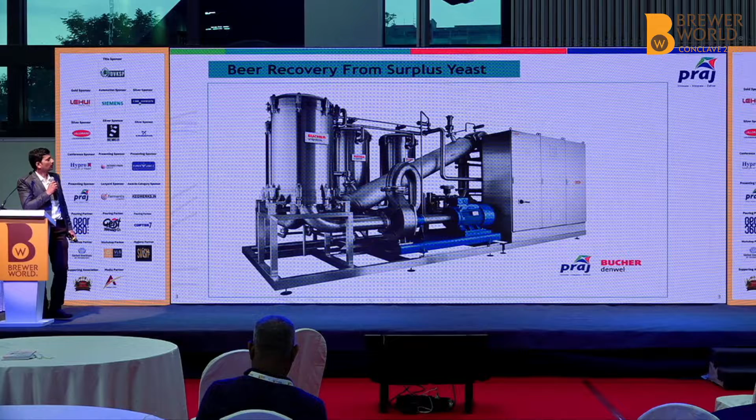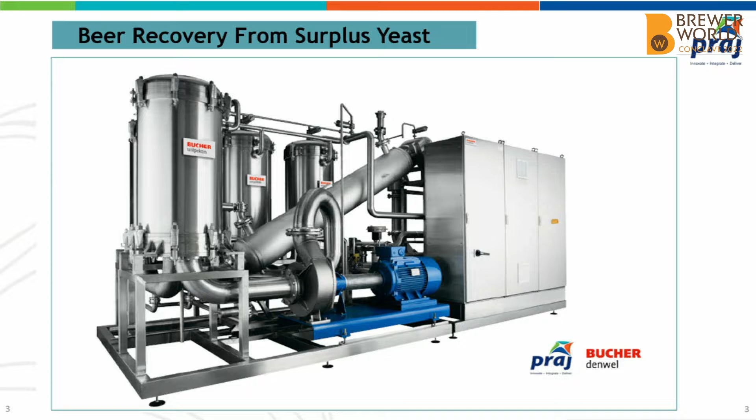So this is basically Bucher cross-flow filtration, which handles the surplus yeast, and from that surplus yeast we can recover the beer and use it as a direct sale. Many breweries nowadays are draining approximately 2% beer in the yeast. Whatever yeast is recovered from the fermentation has 2% beer, and that is presently drained to the ETP. Disposal of this yeast is very critical from a BOD and COD point of view. To recover it, we have different membrane technology, and we have a tie-up with Bucher Denwel. This cross-flow filtration will help to recover the beer from this wastage.

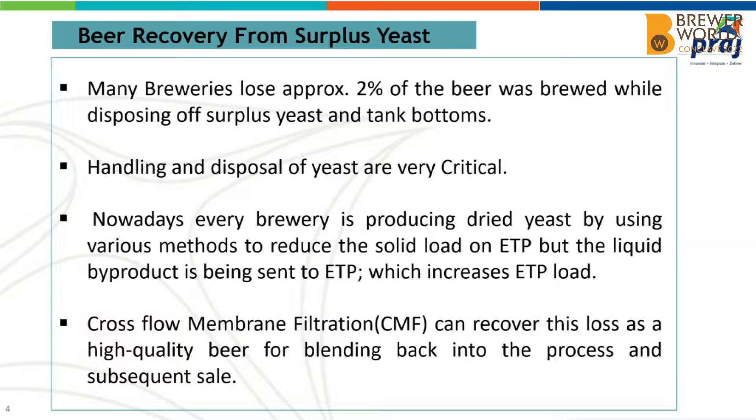Every brewery nowadays is making dry yeast, which is sent to poultry and has high protein. This will reduce the ETP load. But whatever liquid is generated in that process is sent to the ETP, so the BOD and COD of the ETP will increase. To avoid that, we can use this beer recovery system. Whatever beer is generated from the beer recovery system, we can use to dilute the main beer, and the yeast will be sent to the dryer to dry the yeast.

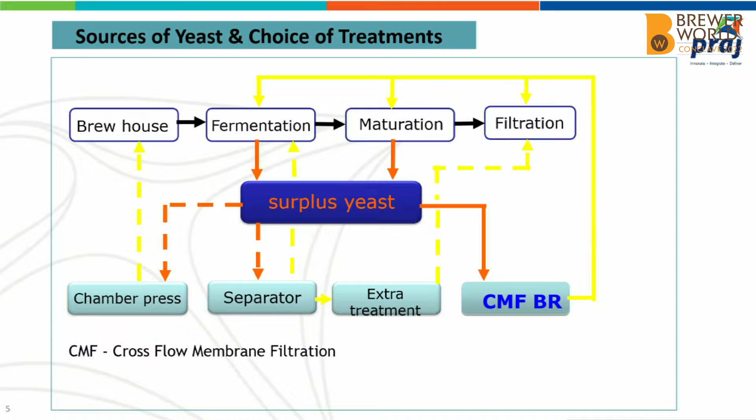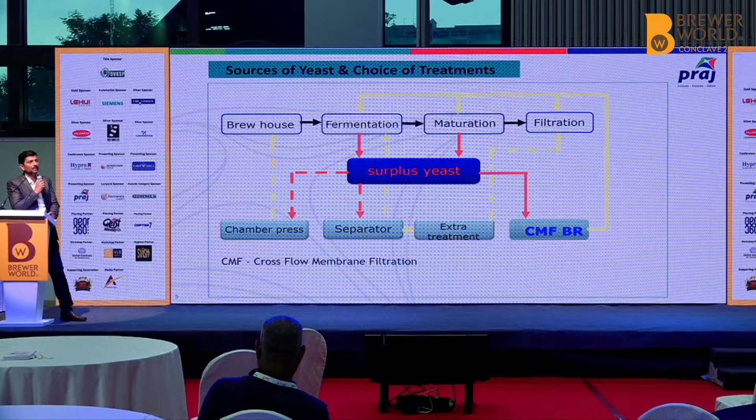There are presently three technologies. First, the chamber press: with the help of a hydraulic press, we can compress the yeast and do liquid and solid separation. Second is the separator, which is a centrifuge. We pass the yeast through the centrifuge and concentrate it; the liquid goes to the gutter, and the concentrated yeast is used further for the drying process. The third one is CMF BR. CMF is cross-flow membrane filtration. With it, we can recycle this beer and use it as it is without compromising the quality of the beer.

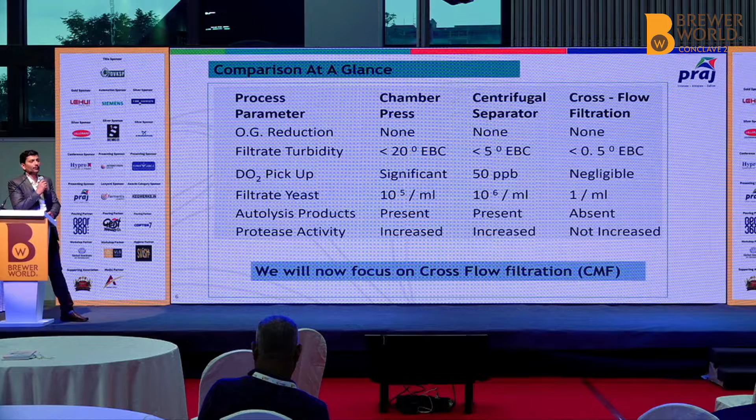Third is autolysis products. Whatever breakdown happens due to yeast breaking is absent in cross-flow filtration when we are making beer from it. And protease activity also does not increase when we use cross-flow filtration. So basically, these are the merits of cross-flow filtration over the other filtrations. Of course, it depends on the yeast quality, quantity, and yeast type being used, so it may vary on a case-to-case basis.

So this is cross-flow filtration. In traditional filtration, the flow is perpendicular to the young beer, input to output flow. But in cross-flow, it is parallel to the main feed flow. That is the main difference.

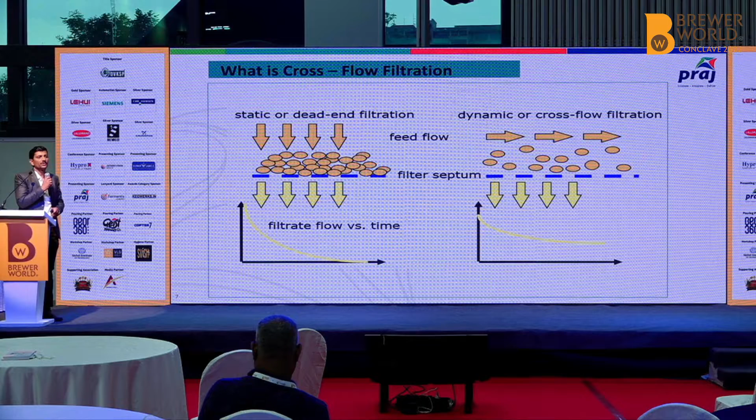In the traditional way, the flow rate decreases as time increases. But in dynamic cross flow, with respect to time, we are getting a constant flow rate. Definitely, whenever there is a pressure drop, flow will decrease, but compared with traditional, it is a smaller decrease of flow. So we will get more throughput compared to the traditional system.

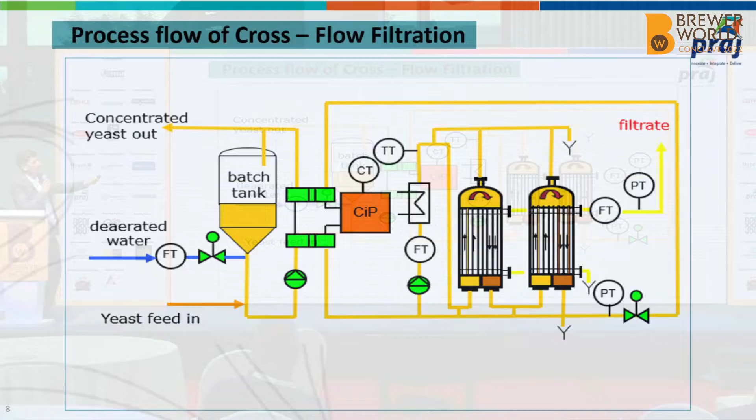So basically, the yeast is sent to the batch tank. There is a circulation method. By doing circulation, we will get concentrated, uniform yeast, and then it will transfer to the membrane-based filter. In the membrane-based filter, depending on the pressure transmitter and flow meter, whatever beer is there, that filtrate is coming out, and it is again recirculated.

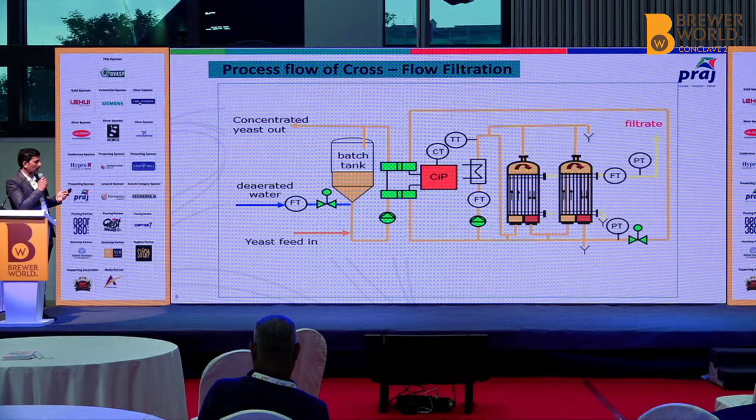And whenever the pressure difference is less, with the help of a control valve, we can add deaerated water. So the flow rate will increase, and that will improve the beer recovery from the yeast. And at the end, the concentrated yeast we can send to the dryer. So this is a simple flow diagram.

We have installed this beer recovery from yeast with cross-flow filtration in one brewery in India. CMF can recover beer loss from yeast as it is a high quality beer, so we can use it as it is and sell it as it is. This recovery also reduces the effluent burden, as I have discussed earlier.

Beer and yeast have higher BOD and COD values. So if we recover this yeast and beer, that will decrease the BOD and COD value at the ETP, and simultaneously reduce the ETP load. Recovery of beer also needs less energy. Compared to the traditional way of making beer, the consumption required per HL or per kWh is comparatively less in the beer recovery system.

And it will give a maximum 90% yield. Again, it will depend on the generation of the yeast we are using for this cross-flow filtration, whether it's fifth generation or sixth generation. Depending on the generation, the yeast quality, and type of yeast, this efficiency may vary. It is a completely automatic process, so operator interference is very less.

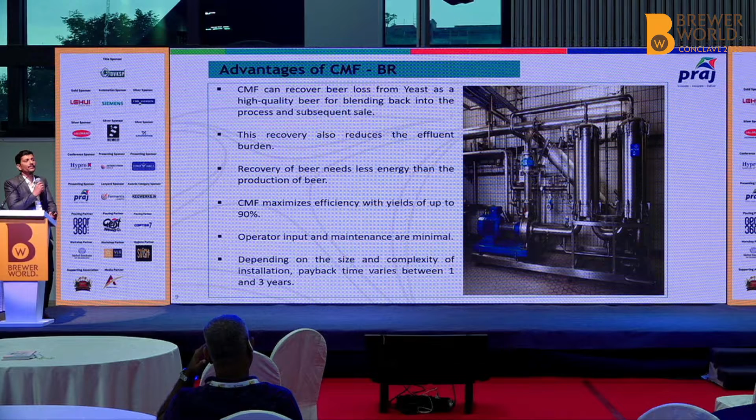Depending on the size and production capacity, the payback time varies from 1 year to 3 years. Presently the beer is sent to the ETP only, so it is a wastage to the brewery. If we install this, that wastage we can convert into money. That's why the payback period is between 1 to 3 years. Considering the various beer production units and their volumes, we can calculate and provide the detailed calculations.

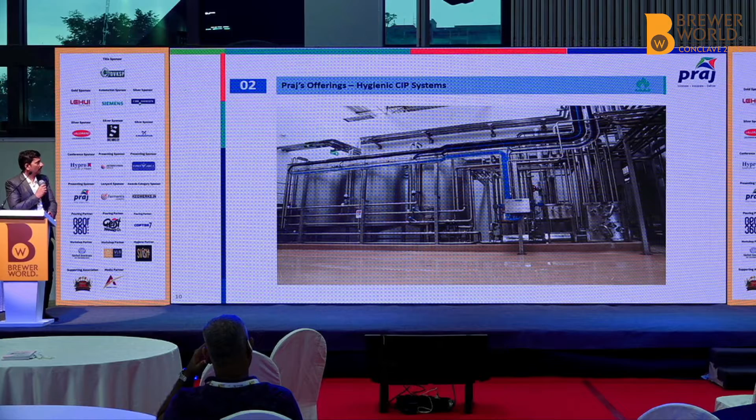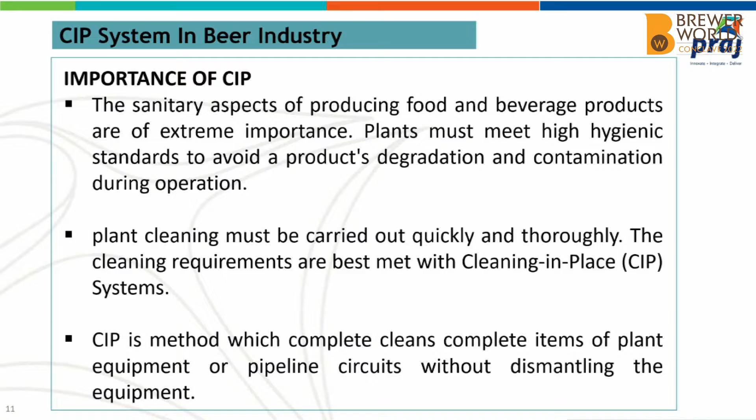My second topic is Praj offering a hygienic CIP system. As everyone knows the importance of CIP, because we are working with the food and beverages industry. CIP is very important to control the growth of microorganisms, and it will improve the hygienic condition of the complete plant. Without dismantling the equipment and piping, we can do the CIP. These are basically the importance of CIP in the industry.

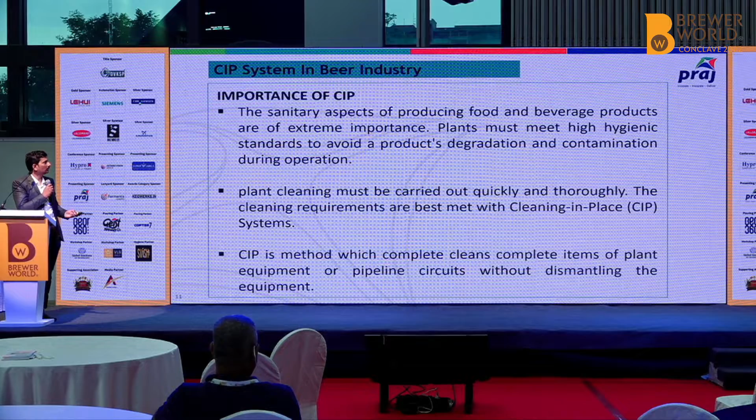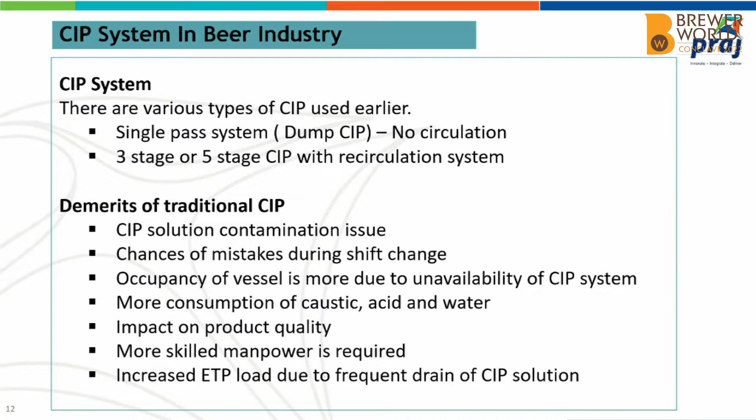Traditionally, people use two types of CIP system. One is a single pass system, that is a dump CIP. A simple tank is there, a pump is there. With the caustic preparation we do the CIP, and after the CIP, we drain the caustic. The second is a 3-stage or 5-stage CIP with recirculation system. All the old breweries have either a dump CIP system or a 3-stage or 5-stage system.

But nowadays, since Heineken, Carlsberg, UB, and AB InBev have entered the market, the quality of the beer and the quality of CIP has improved. The demerits of the CIP system are that we use the same CIP for the filtered beer area and the unfiltered area. The same caustic and the same tank are used, so there are CIP solution contamination issues.

Some people drain the caustic and prepare the caustic again. If there is a shift change and the first operator has done the CIP of the unfiltered area, and now the second shift operator wants to do the CIP of the filtered area, and the operator has not communicated that, then the unfiltered area CIP solution can be used for the filtered area. So chances of mistakes are there.

Occupancy of vessel is more due to unavailability of CIP system, because these are 3-stage and 5 stages of one CIP system. So I want to do the CIP of Unitank, and simultaneously I want to do the CIP of BBT. So this will increase my occupancy of the Unitank and BBT. Then frequent draining of caustic, acid, water, so more consumption is required. Impact on product quality, definitely.

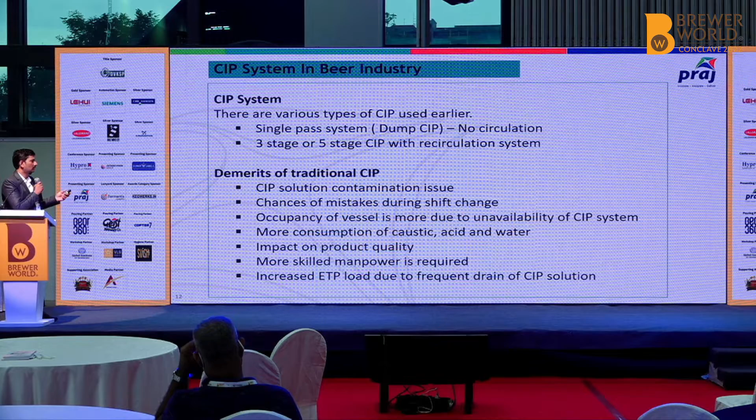More skilled manpower is required, as mentioned earlier. And due to frequent caustic and acid draining, it will increase the ETP load. Nowadays, ETP is very challenging in every brewery. So to reduce the ETP load, we are offering the system. So whatever CIP system Praj offers is a dedicated separate CIP for each section.

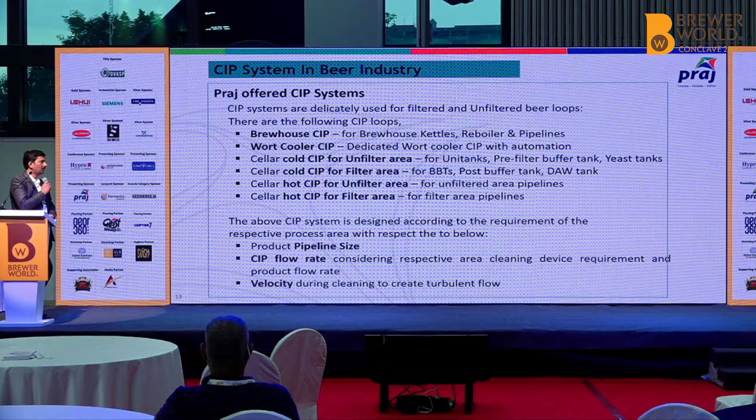Brewhouse CIP, which caters for brewhouse kettle, reboiler and pipeline. Wort cooler CIP, that is a dedicated wort cooler CIP with automation. Cellar cold CIP for unfiltered area, that will be used for unitank, pre-filter buffer tank and yeast tank. Cellar cold CIP for filter area for BBT, post buffer tank and DAW tank.

Cellar hot CIP for unfiltered area, that is unfiltered area pipeline. And cellar hot CIP for filter area, so that will be used for filter area pipeline. So the above system is designed according to the requirement of the respective area. So product pipeline size, whatever the CIP is there, generally it is with respect to velocity. So we can do an optimum design for filter area CIP and unfiltered area CIP.

So CIP flow rate, for example my filtration is 200 HL per hour, so my CIP flow rate should be 200 HL per hour. But whereas for young beer, bright beer, when I'm doing dilution, then that flow rate will go to 300 HL per hour. In that case, my CIP flow rate is also increased. So as per the CIP flow rate, we can design this system, and we will maintain this velocity. This velocity will create turbulence during the CIP, which will give better cleaning efficiency.

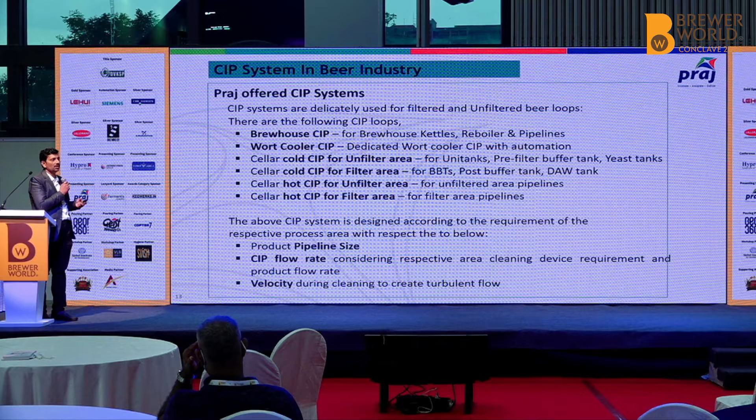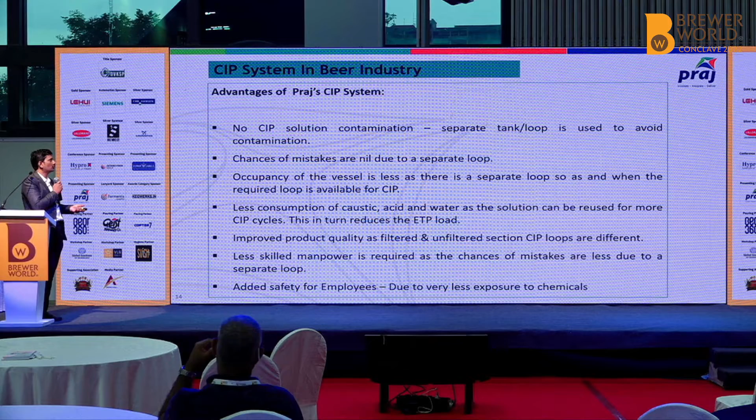So if we do the dedicated CIP system in each area, that will improve the quality of the beer, and the quality of the CIP solution, which we can reuse every time, and we can top up as per the concentration requirement. So what are the advantages of the CIP system? No CIP solution contamination, as a separate tank and loop is used. Chances of mistakes are nil due to a separate loop.

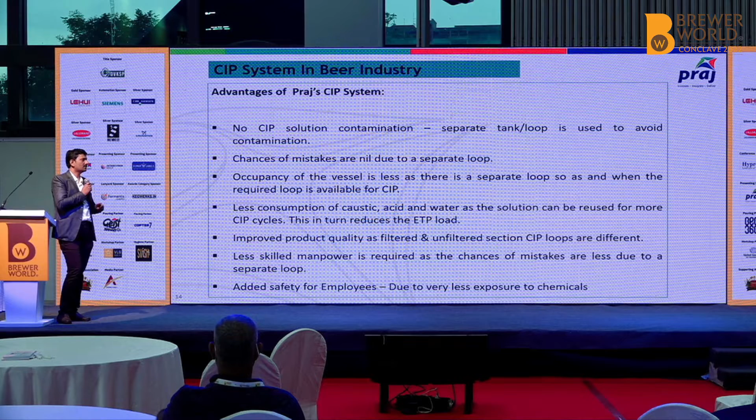Occupancy of the vessel is less, as there are separate CIP loops. So today I can do BBT CIP and Unitank CIP simultaneously. Less consumption of caustic, acid, water, as we are using the same solution, as there is a filter area and unfiltered area CIP. So we can use the same solution by increasing the concentration of the CIP solution. Improved product quality, as filter area and unfiltered CIP loops are different.

Less skilled manpower is required, as the chances of mistakes are less. And added safety of employees due to very less exposure to chemicals, because we do not have to prepare the chemical solution frequently. These are the CIP solutions.

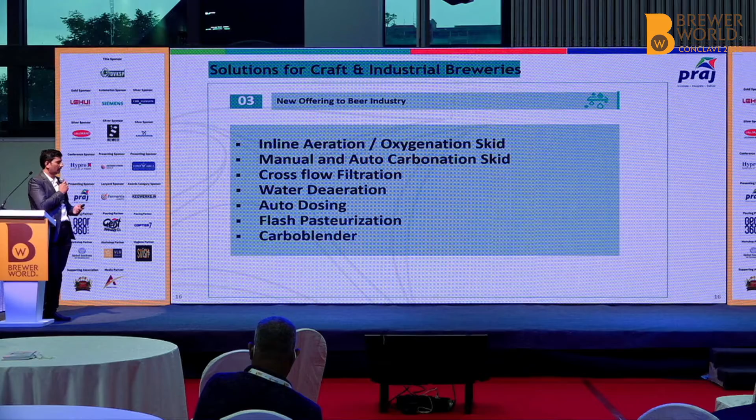And my third topic is the Praj and Bucher Denwel new offering. As you know, Praj and Bucher have a partnership for India, and Bucher Denwel is a joint venture, and with the help of Bucher Denwel, we can offer the system to customers. They have dedicated skid systems: inline aeration and oxygenation skid, manual and auto carbonation skid, cross flow filtration, water deaeration, auto dosing system, flash pasteurizer and carbo blender. So we can offer this to the craft industry as well as industrial breweries.